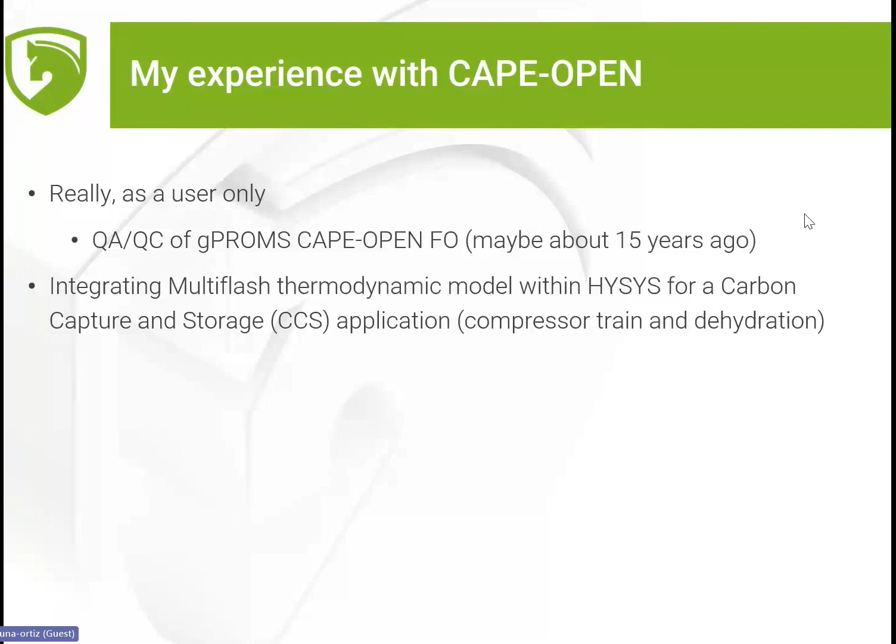And then some years down the line, I did some work integrating Multiflash, which I suppose you know, with HYSYS, for a CCS application, but it was very, very simple, just a compressor train and a dehydration within HYSYS, run using the Multiflash thermodynamic model for the physical properties. And that's really my only experience with CAPE-OPEN.

But I just want to talk a bit about what we want to do with this and what is the motivation. This is what we call a CCS cluster. Unfortunately, I think I missed the first part of the presentation of Jens that was talking about CCS. So I don't know how much he went into explaining what CCS is, but I'm going to go maybe slightly quick.

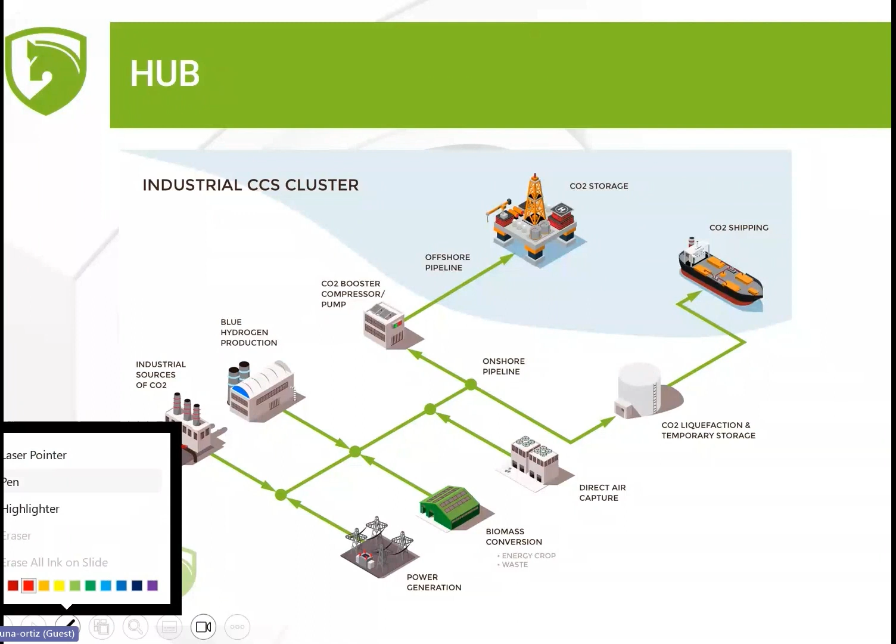So we want to capture CO2 from various industrial sources, and that could be a power generation plant or DAC, so direct air capture, or blue hydrogen production, et cetera. Various industrial sources, like cement, like the one Jens was saying. So we capture those industrial CO2 emissions, and they are gathered in transportation systems, normally onshore, and then the CO2 is further compressed and boosted and sent either for offshore storage via pipelines or potentially exported via shipping.

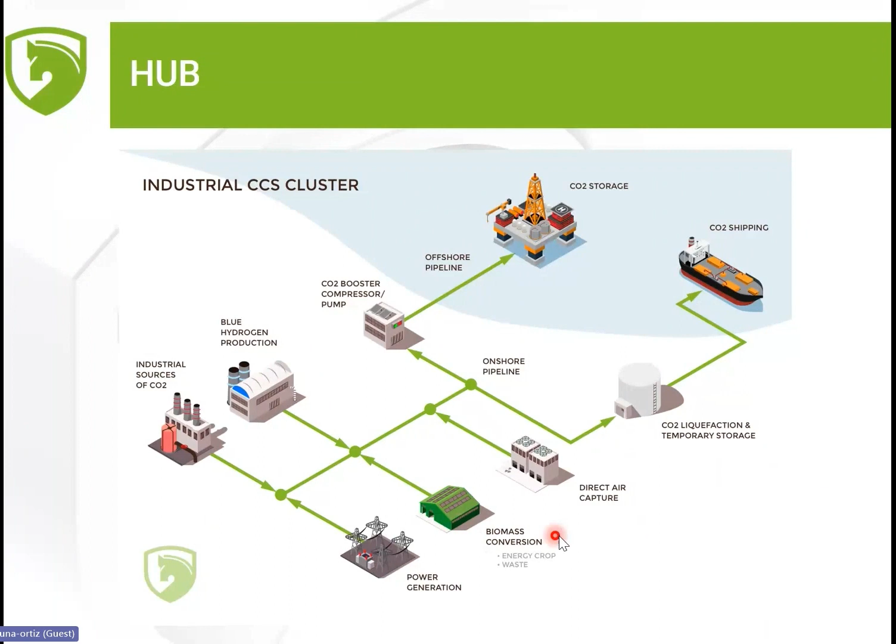So this is the type of system that we are looking at, at least in Europe and in many places. And the reason that we want to do this in industrial CCS clusters is basically economies of scale. It gets cheaper for the system by sharing facilities.

In the case, for example, of many oil companies, they have also been doing CCS. They are capturing their own emissions. So that's what we call one emitter, one source. So they capture their CO2, they strip the CO2 from the natural gas, for example, and then that CO2 is piped and sent for permanent storage, possibly in saline aquifers.

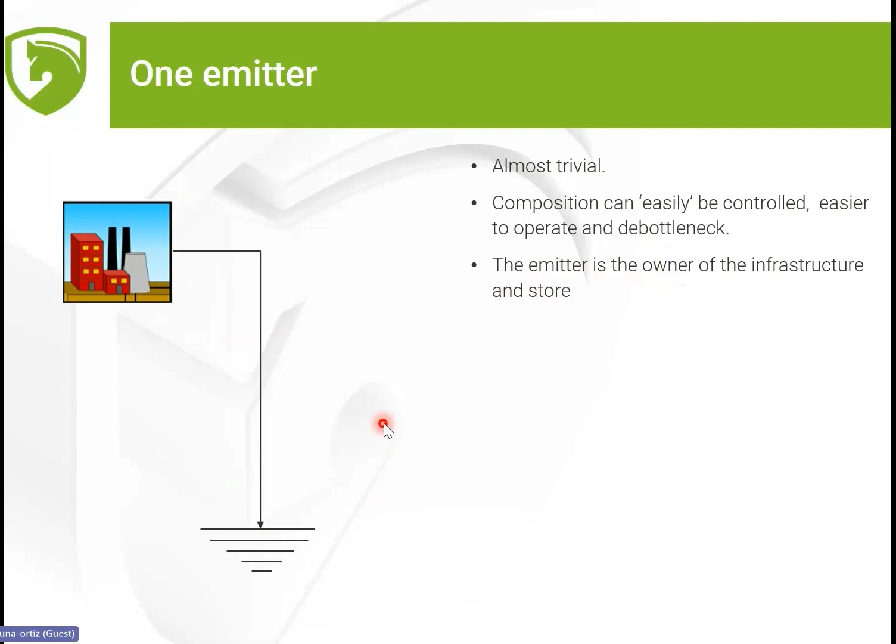The operation, and I think the modeling of this type of system, is almost trivial. And the reason I think it's almost trivial is because the composition can easily be controlled. So the system can be easy to operate and to debottleneck. And this is mainly because the emitter is the owner of the infrastructure and store. So designing this kind of system and also operating it is kind of trivial. It's very simple.

But what happens is when we have various emitters, each emitter is going to have perhaps different flow rates. Each emitter is going to have a different composition. Even though they're going to be subject to the same specification, they're all going to have different compositions, because it depends on the type of industry and the type of capture technologies that they have.

The other important thing when we design these systems is that we know the system is going to start, let's say, in 3 years, we know that we're going to have maybe 2 or 3 emitters, but this system is going to be operating for 20, 30 years. So over that period of time, we think that future emitters are going to be tying in. So we need to design the system keeping in mind that future unknown emitters are going to be tying into the system.

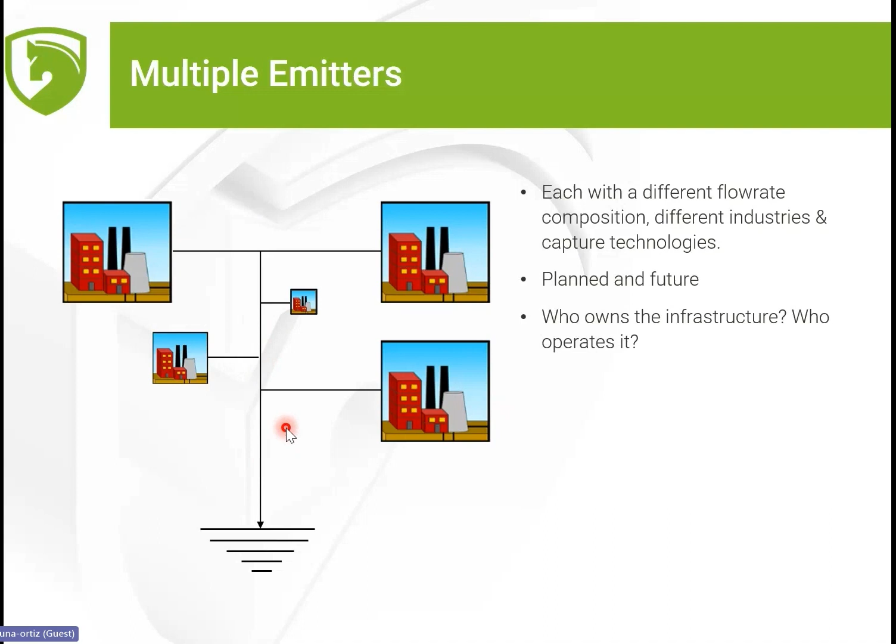And the most important thing is that the owner and the operator of the transportation and injection infrastructure is most likely never going to be any of those emitters. So the CO2 that's going to come into the infrastructure is not going to be really controlled by the operator of the network, and that brings a lot of challenges, not only for the design but also for the operation.

And I think it was also mentioned before. The CO2, when we're talking about CCS or industrial CCS, in reality is never pure. We say CO2, but it's never actually pure. So we're going to have literally almost every possible chemical compound that you can imagine, depending on what the source of that CO2 is.

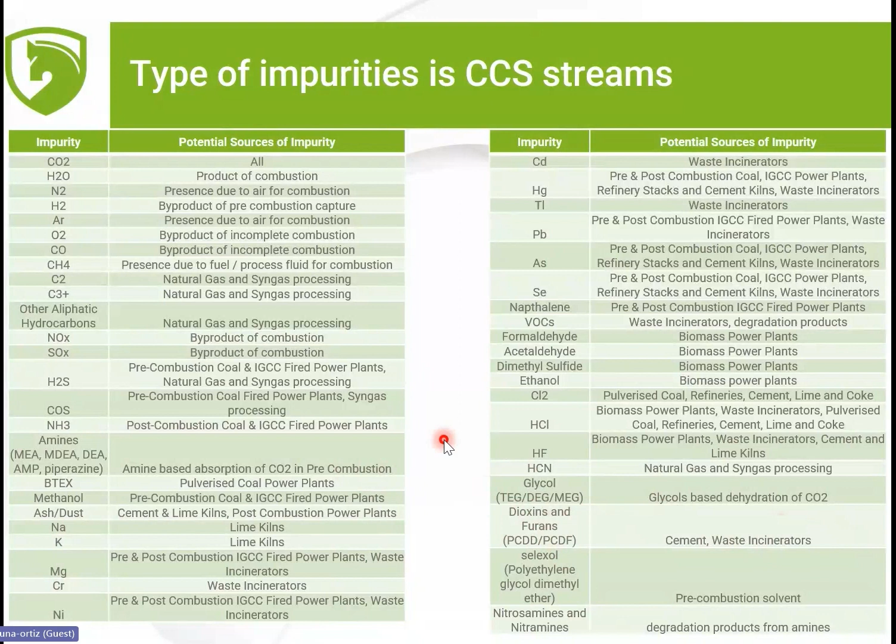And of course, if you have a lot of different emitters with different capture technology or process technology, you're going to have at the end in your transportation system a whole cocktail of stuff, and you're going to have weird stuff like dioxins and sulfur compounds that come from cement or waste incinerators, which are not necessarily an issue from the thermodynamics point of view, but are going to be an issue for health and safety, for example. So when we say CO2, it's actually CO2 with a lot of impurities.

And those impurities, as was mentioned before, have a lot of effects. Water, for example, is something that we are very concerned about because it leads to corrosion. We have 50 parts per million of water, and this is the blue line. The green line is the dew line with that amount. So we specify the water dew point to be, say, minus 30 degrees at 10, 15 or 20 bar.

But for example, 2,000 parts per million just completely shifts the water dew line to the right. So we're operating around this range, which is kind of the operating range of CO2 gas transportation in pipelines, and this is an issue.

Not only that, we know that depending on the different impurities that we have in the system, if we do have some aqueous dropout, some water dropout, depending on the amount but also the type of impurities, we are going to see different corrosion rates. For example, this is a corrosion rate. I think this is stainless steel with only CO2, so it's very low.

But once you have different types of impurities, in this case not only water but for example oxygen and H2S or SO2, we have different corrosion rates. Once you have more than 2 impurities, suddenly your corrosion rates start changing. So this is also a complication when we do the design of the pipelines, because we need to know if we are going to have a corrosion allowance, or how many times we are going to see these types of events in which the system is operating in this region.

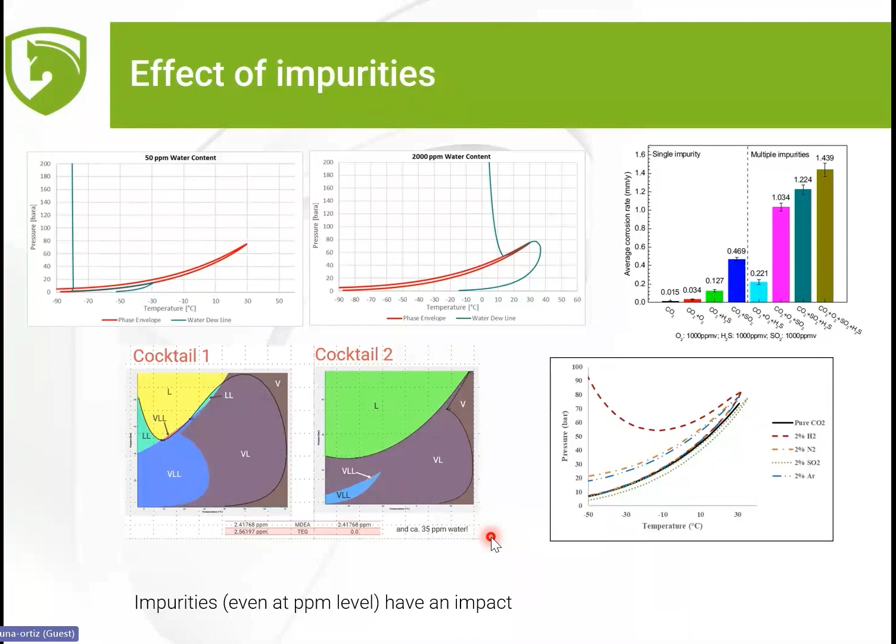And obviously, the more impurity that you have, for example, the hydrogen moves the bubble point of the system to higher pressures, and it's important to know because if we don't want to operate in two-phase, the more hydrogen that we have, the higher pressure that we need to operate. So I think the message here is that the impurities are important to know, and even at a parts per million level, they have an impact, and we need to be aware and to be able to model that.

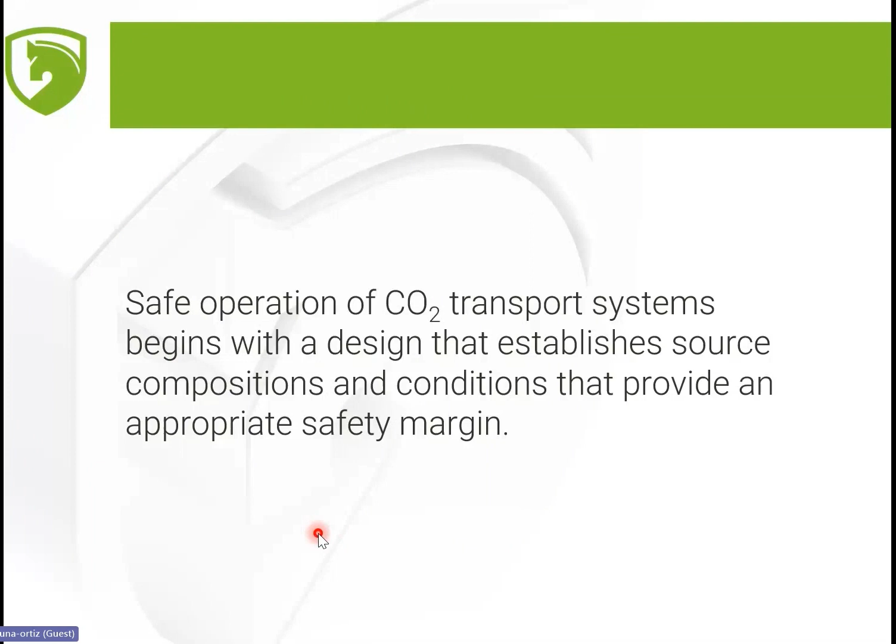I think the safe operation of the CO2 transport systems begins with a design that establishes the source of the compositions and the conditions that provide the appropriate safety margin. And the thermodynamics, from my point of view, is the umbilical cord of the process modeling. And this is when we started asking questions. For example, what is the best model or the best equation of state when we want to model CO2 with impurities? I don't think we can answer that question because it really depends on the chemical nature of the compounds. It also depends on how the results of that model are going to be used, and the implementation. So where is the model implemented?

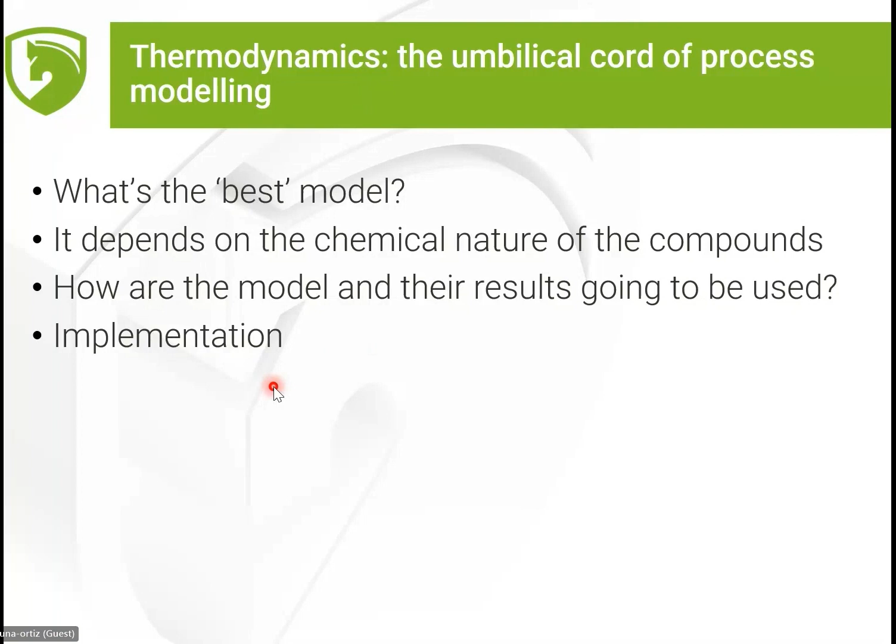But after all, all the thermodynamic models are going to have limitations. For example, we're going to have failure near the critical point, which I saw clearly in the previous presentation on CCS. Jens showed some phase envelopes where close to the critical point there was a failure, or at least the lines were not joining at the critical point. We're going to have perhaps poor liquid density predictions. Some models are going to be computationally expensive. Also, we're going to have problems with compatibility between different softwares, etc.

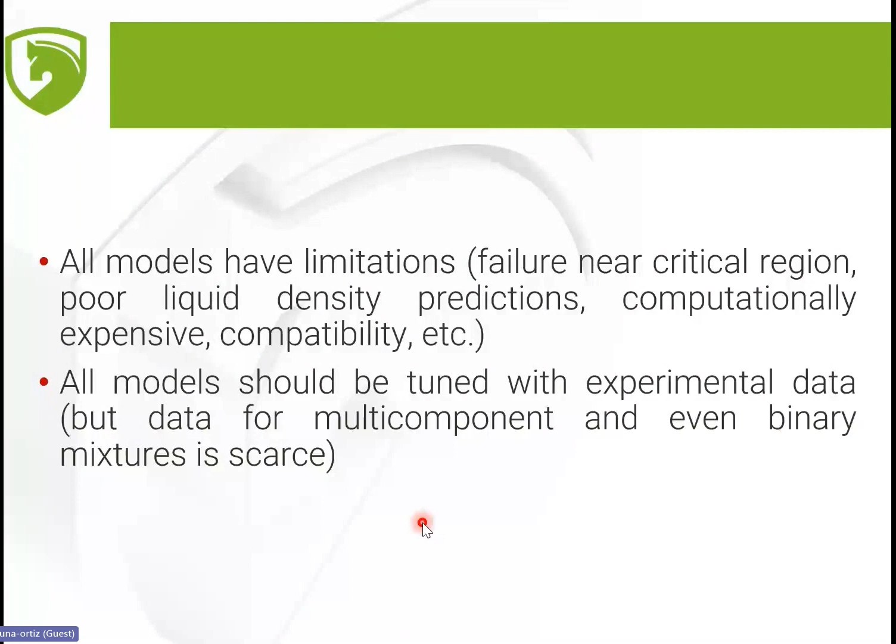Ideally, we should be able to tune the models with experimental data. Unfortunately, for CO2 mixtures with impurities, that data is very scarce. And that brings me to thermodynamic consistency. We want to ensure consistency through the nodes of the CCS system, because what we don't want is a plant that captures and compresses X amount of CO2, and then the pipeline, modeled with a different software platform and a different property package, is suddenly designed for a different amount of CO2, and then the reservoir, because it's a different platform also, is suddenly storing a different amount of CO2.

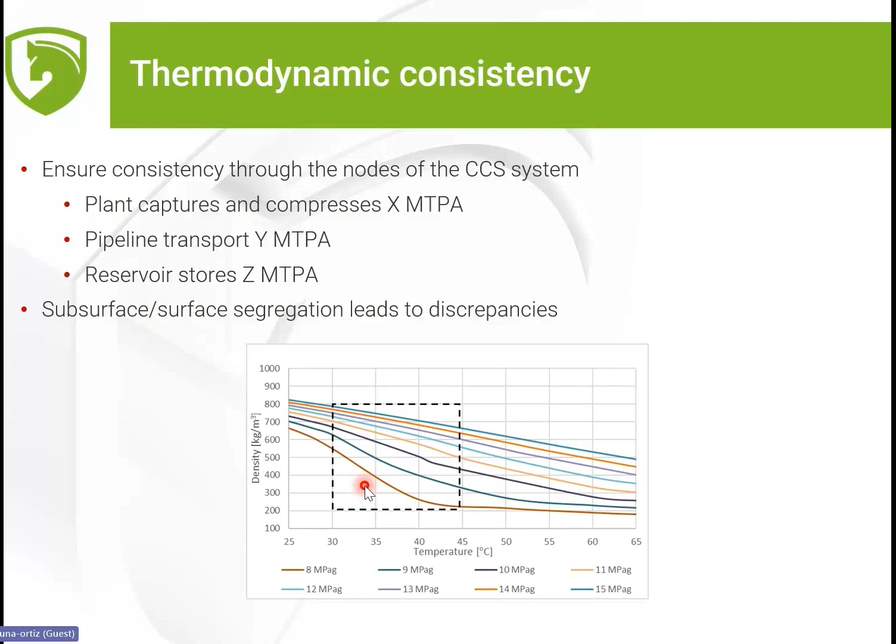And one way that we manage thermodynamic consistency is using integrated modeling. One tool that we're starting to use a bit more is a software called Maximus. This is what we call integrated production modeling, which initially was developed for oil and gas applications. This software is now developed at KBC, uses Multiflash, and connects to PETRO-SIM.

It's a rigorous pipeline and well thermohydraulics tool. The reservoir can be represented as a tank model, and it provides us life of field simulation. That means we can model 30 or whatever amount of years, and it's a steady state simulator. And this is one way that we can actually ensure consistency, if we use, for example, Multiflash as our PVT simulator.

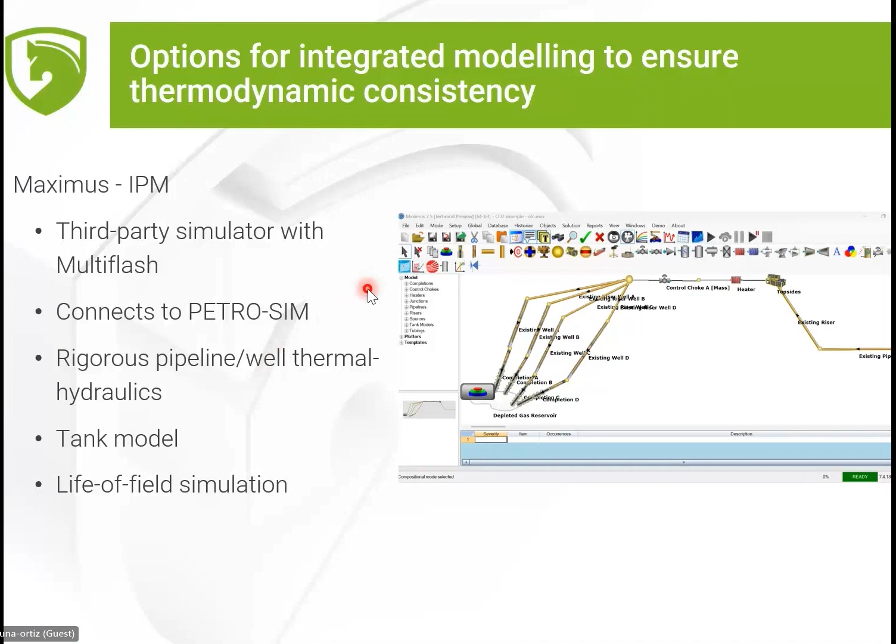Another thing that we are also using now here in PACE, or we're starting to develop, is something that we call digital twin. In reality, it's a digital tool that models the entire system. So it's integrated: we integrate surface and subsurface, not that dissimilar to the way that Maximus is doing. We don't have tank models, we have lookup tables, and these lookup tables are obtained from rigorous reservoir simulations that we get from clients.

The pipelines, the wells, the compressors, things like that, are the physical mathematical representation, so they're first principle models. Also the important thing is the thermodynamics: in this case we use Multiflash as our package, but we don't interface directly with Multiflash, we interface with lookup tables that we generate from Multiflash.

This allows us to quickly understand the full chain operability, what-if full chain modeling, and it provides most of the time a very intuitive big picture for regulators and management. This is a product that we're doing in collaboration with ABB, so eventually this is going to go into their control systems.

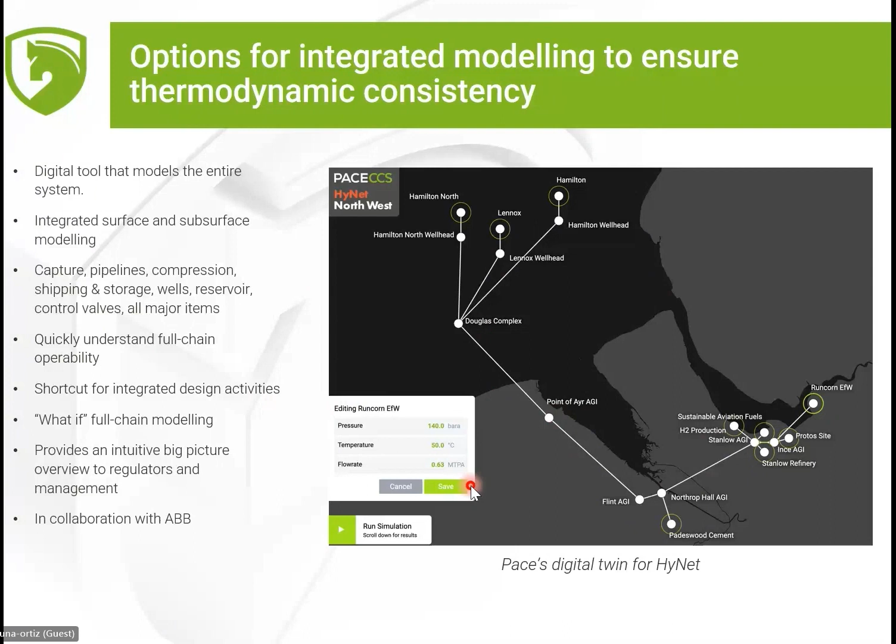The other project that we are doing, and we just started, I think, in May, is a project called CCS Twin. It's a Eurostars project. In this project, which I think is 2 years, the plan is to redevelop all the process models, I think in a Julia environment. This work is in collaboration with Hafnium Labs.

So we're going to develop the process models, and we're going to connect to QProps somehow. I still don't know exactly how, although we haven't discarded just yet the use of CAPE-OPEN. So I don't know how we're going to do it just yet, but it's something that we're starting to look into.

And the roadmap for the future is that we in PACE have to convince partners or clients of the advantages of CAPE-OPEN, particularly when we have existing CAPE-OPEN compliant software. In oil and gas, most of the clients are in the upstream, so they don't know much about CAPE-OPEN.